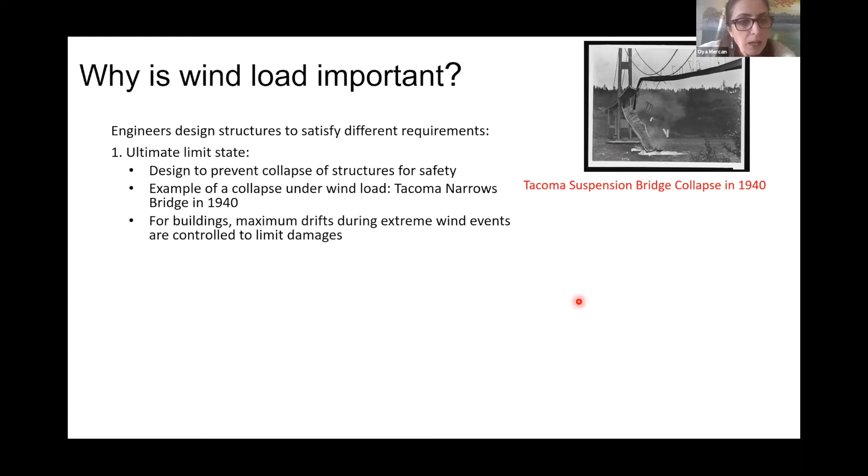In addition to safety considerations, we also make sure that the serviceability limit states are satisfied, which means that the drifts, accelerations, and vibrations of the structure are kept under some limits so that the occupants can use that structure as designed. We wouldn't want the structure to experience non-structural component damage.

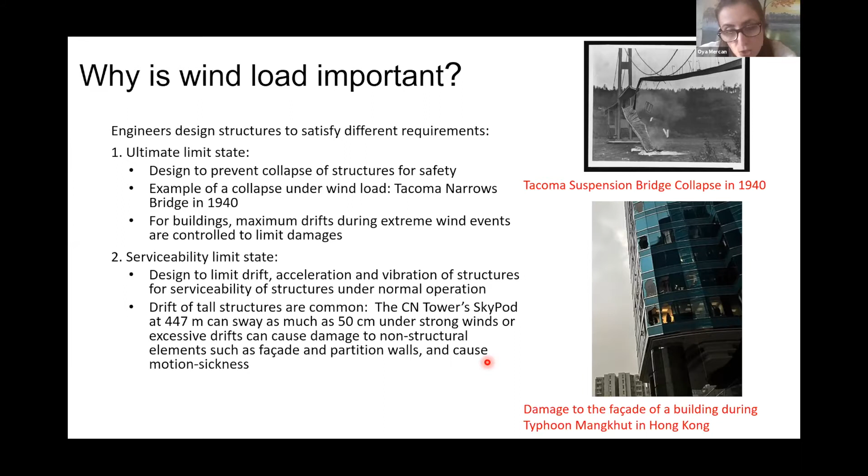For example, the picture on the right here shows damage to the facade of a building during a typhoon in Hong Kong. We also wouldn't want the structure to experience large accelerations and vibrations, making the occupants experience motion sickness or seasickness. So to make sure we design the structures properly, we use what is called the Davenport wind load chain, developed in the 1960s.

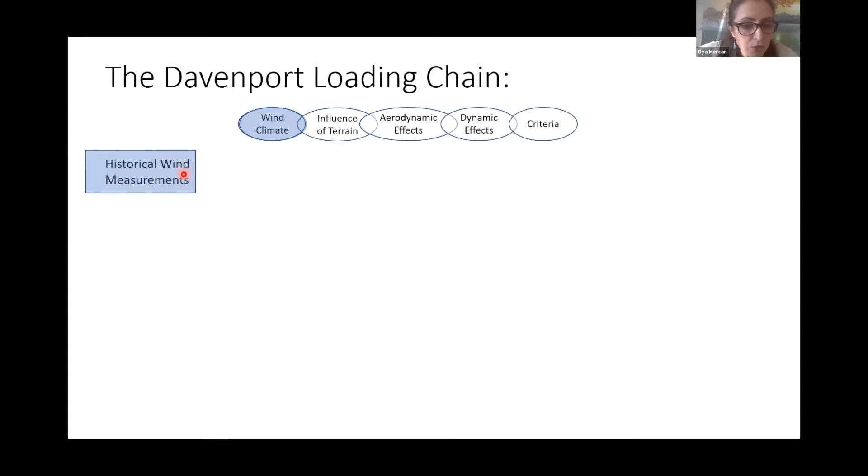In this load chain, on the left side, we start with the wind climate. Typically, in traditional application of the wind load chain, this information about the wind speed and wind climate comes from historical wind measurements, typically from airports.

Now we need to introduce the influence of the terrain. If we are designing a structure in open terrain with a smooth surface, the wind speeds near the surface are going to be much larger than designing a structure within a rough terrain, such as a city center. So depending on where the structure is going to be built, we need to adjust the wind speed profile accordingly.

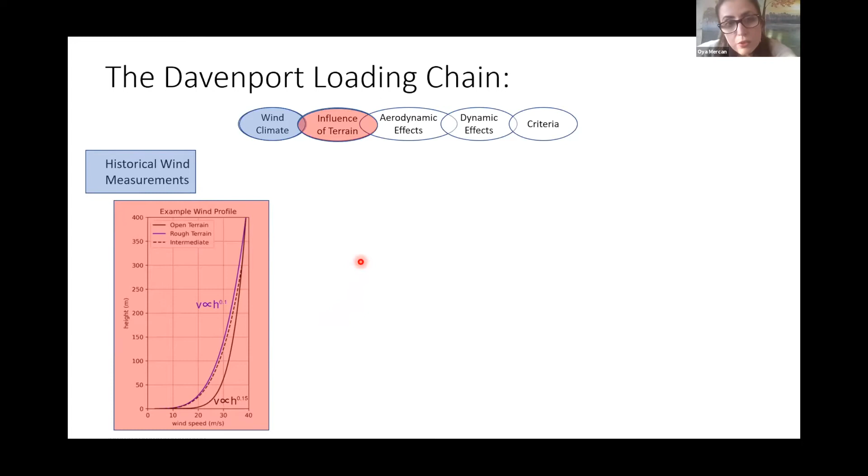We then need to consider the aerodynamic effects, which is simply the interaction between the wind flow and the structure that is causing the loads acting on the structure as the resultant of the wind pressures.

Depending on the complexity of the structure, if we are allowed to use codes and standards, we can quantify the wind loads using the codes. In Canada, we are using the National Building Code of Canada.

If we are only interested in the along wind direction, we can use some stochastic wind load methods to quantify the wind loads. If we are interested in understanding the three-dimensional wind load acting on the structure, and if we have capability to do experiments, we can use wind tunnel testing, or we can do a virtual wind tunnel using computational fluid dynamics. Within our group, this is the fourth one.

The CFD approach is what we are doing. Here we have a structure in a virtual wind tunnel, and we can visualize the wind flow around the building at different angles of attack.

Once we quantify the wind load, the next link in the chain is the dynamic effects. To be able to do that, we need to simulate our structure using structural dynamic tools.

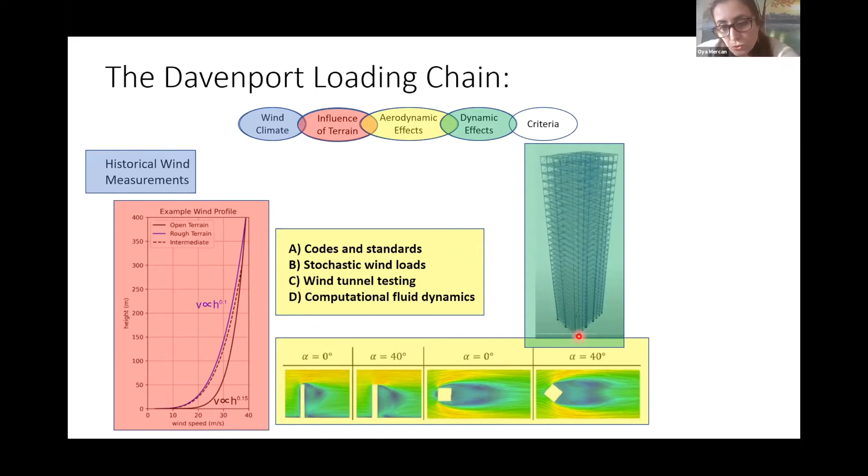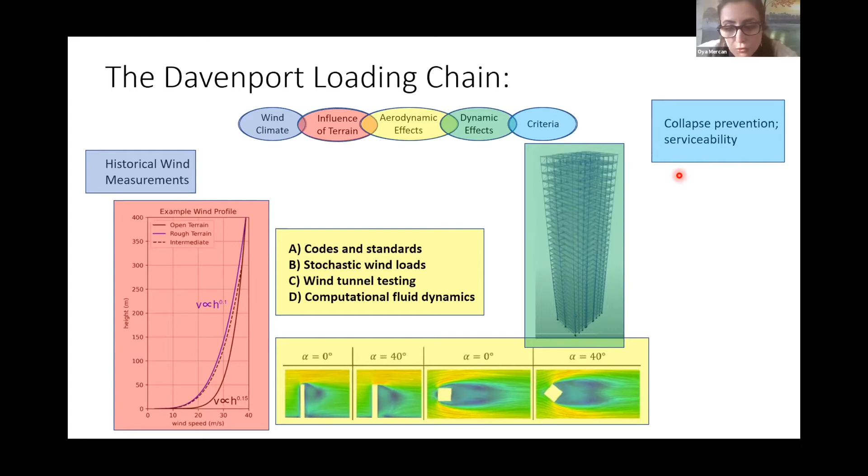Finally, once we finish all the steps in this link, we can have quantities of interest at hand, such as drifts, accelerations, velocities of each floor. Then we can introduce our collapse prevention and serviceability states to decide whether or not this structure performed acceptably.

So when we started doing our transdisciplinary research, what we have done is we took this chain and we left the second, third, fourth, and fifth link as it is. What we have done is that instead of using historic data for the first link, we obtained that information from global climate model projections.

Here we have the graph starting from the 1950s until the end of the century from 19 global climate models for yearly maximum wind speed data. There are different techniques available. In this particular case, we performed statistical downscaling, and Karen Smith and Paul Kushner might talk about this a bit more in detail in later presentations.

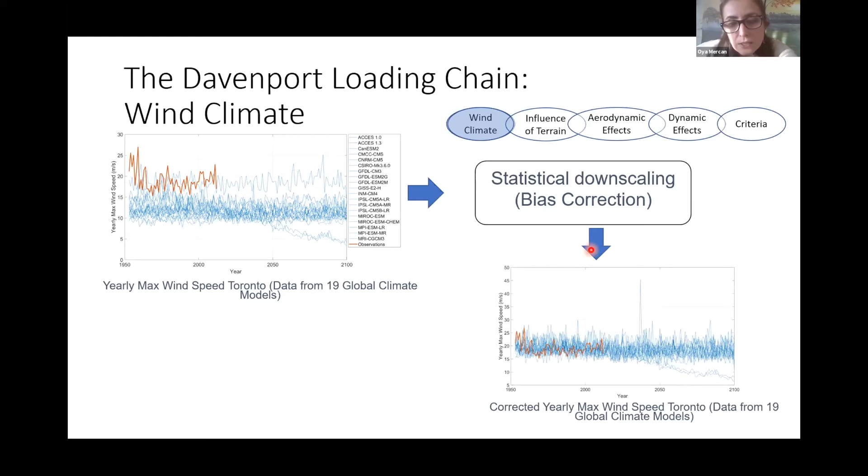Once we have the bias-corrected downscaled data, we can use extreme value theorem to estimate future design wind speeds, and we can propagate that information through this chain so that we can understand what happens to a selected structure under changing wind climate conditions due to climate change.

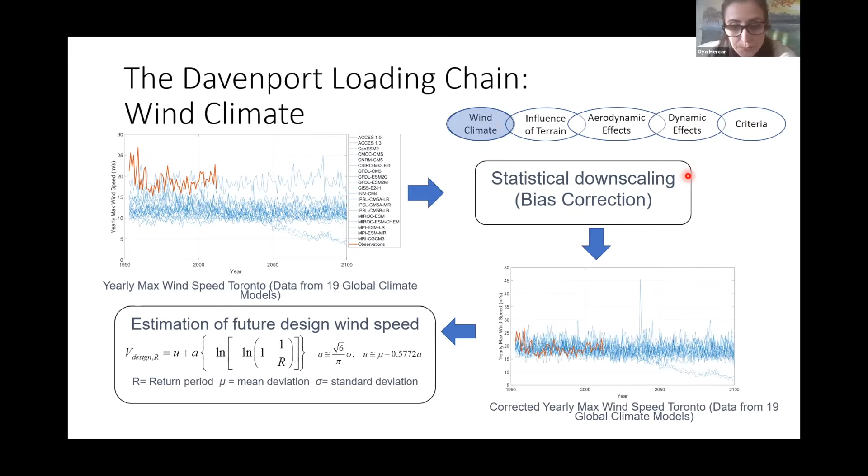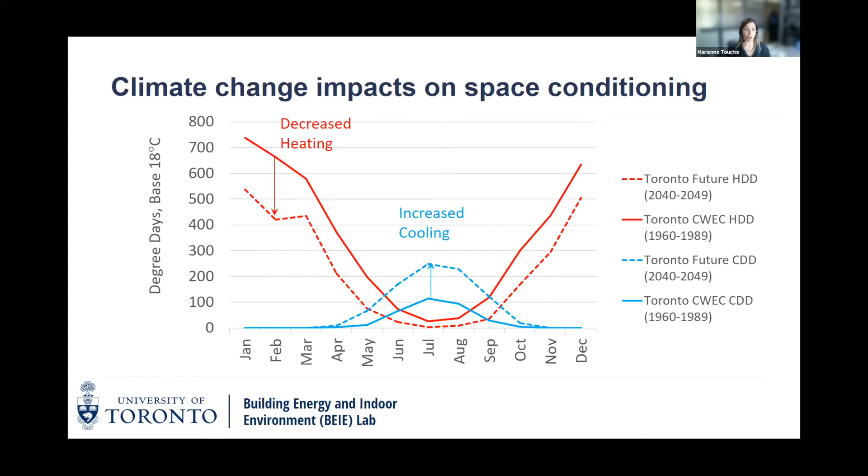So with increased temperatures, we will see a decrease in our heating loads, but also an increase in our cooling loads. And I'm focusing here on heating and cooling because the work that we do is really looking at how building performance is impacted by climate change and in turn impacts climate change, because space conditioning is responsible for the vast majority of building GHG emissions, and so something that we need to pay a lot of attention to in the coming decades.

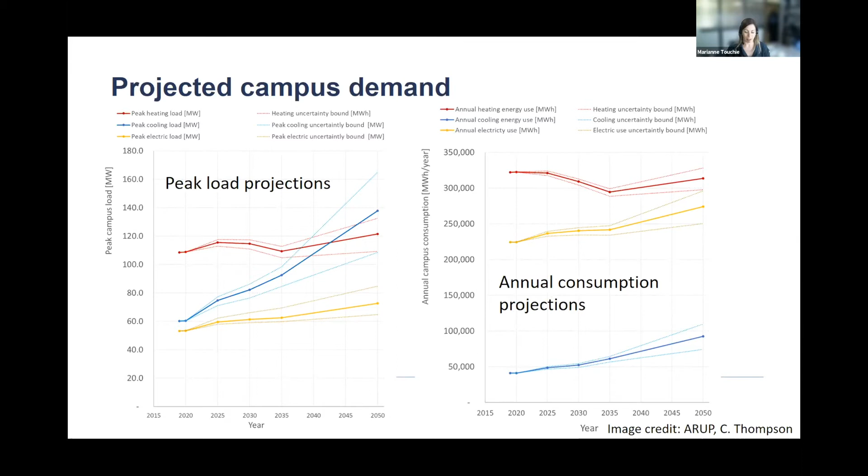And it's not just, I mean, of course, all of this is about ensuring that we're reducing the effects of climate change. We also need to consider on campus the cost of these changes. And so as we move to a low carbon economy, there will be either through carbon pricing or changes to our fuel sources, significant impacts on the university's operating cost. So for all of these reasons, U of T has really undertaken a fairly aggressive carbon reduction strategy, fairly aggressive approach to carbon reduction in the coming decades.

And ideally by 2050, the goal is to get to the point where our carbon emissions are reduced on the order of 80% from where they are currently. And then those are offset by renewables, either on or off campus. And so this path over the coming decades is influenced by a number of different components, contributing components. So how our new building design standards change, how we provide energy on campus.

So thinking about this from an adaptation perspective, ensuring that our existing building systems are designed to keep our occupants comfortable and healthy in a changing climate. We need to think about existing buildings through two lenses. I've mentioned the impact climate change will have on building design and operation, so we need to adapt buildings to deal with changing climates. But while doing so, we also need to ensure we're reducing energy consumption and subsequent GHG emissions for that mitigation piece. Making sure we're addressing both, and although there are synergistic retrofits, there are different things to focus on for mitigation versus adaptation.

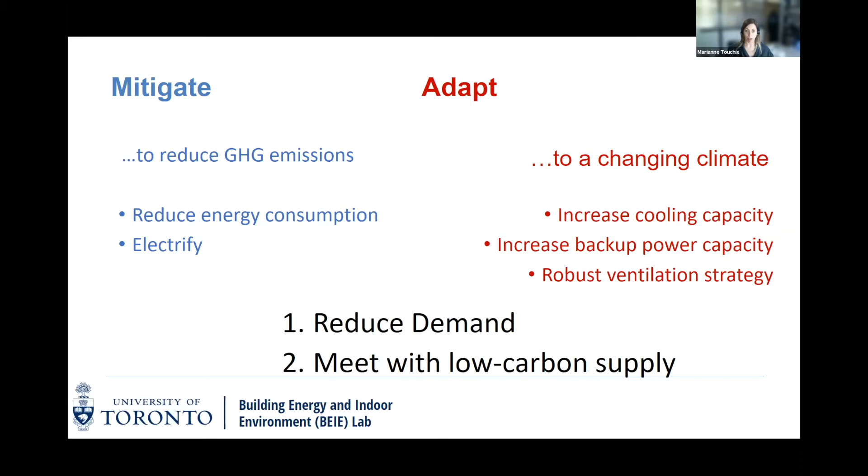This is really the lens with which Joey approached his study. The original scope was meant to take a selection of buildings from across campus representing different archetypes, from fairly modern buildings with centrally controlled systems through to historic buildings with relatively decentralized systems. The realities of gathering the information required prevented us from doing the full suite of buildings, but this became the focus of Joey's work: a couple of decades old, relatively small, simple building on campus, the Fields Institute.

The way we analyze a building is by constructing a virtual model of it and looking at all the heat, moisture, and air transfer within that building, and the energy inputs - the natural gas and electricity required to heat, cool, and ventilate that building and provide lighting and plug loads to all occupants. Then we control this model to essentially mimic the conditions one would see in this occupied building.

We're tuning the indoor temperatures and the amount of outdoor air delivered to these various spaces. Once this model is built, we calibrate it to ensure the modeled energy outputs match the existing utility bills for this building.

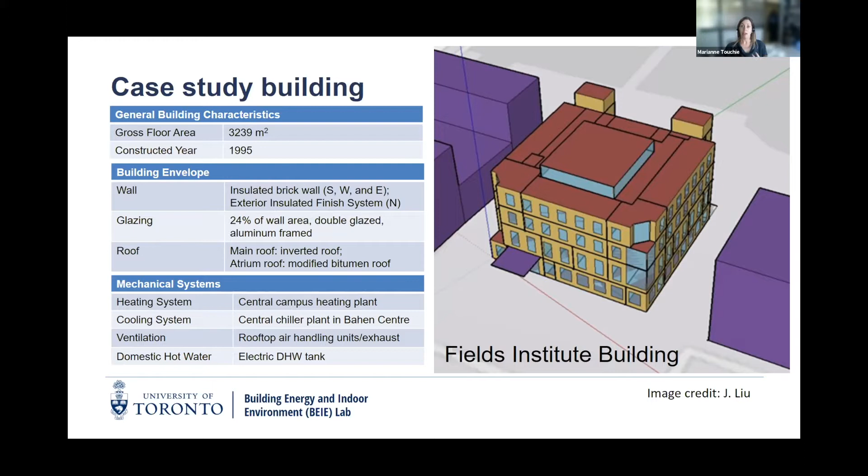Once we have a calibrated model, we can start to play around with things in this virtual space. The objective is to model how this building would respond to a changing climate. One of the inputs to an energy model is what we call a weather file, essentially a snapshot of a year, usually a typical meteorological year, and you run that model to get the output energy consumption.

But with this building, instead of running it with our current weather file, we replaced that with a future weather file estimating what conditions might look like in the 2040s and what the subsequent energy outputs would be.

Then Joey developed a series of both passive and active retrofit strategies to see if we can actually reduce that energy consumption. He tried a number of different things, including optimizing solar gains through things like overhangs and fins - you can see these purple things on the left on the retrofitted building - and window films to again try to control solar shading.

Retrofitting wall systems through increased thermal insulation, replacing the windows with high performance units, and doing air sealing to seal up any uncontrolled air leakage across essentially holes in the building envelope, which impacts energy consumption. The one active measure installed was recovering waste heat from exhausted air and delivering it to incoming air, trying to recover some of that waste energy in order to reduce energy consumption.

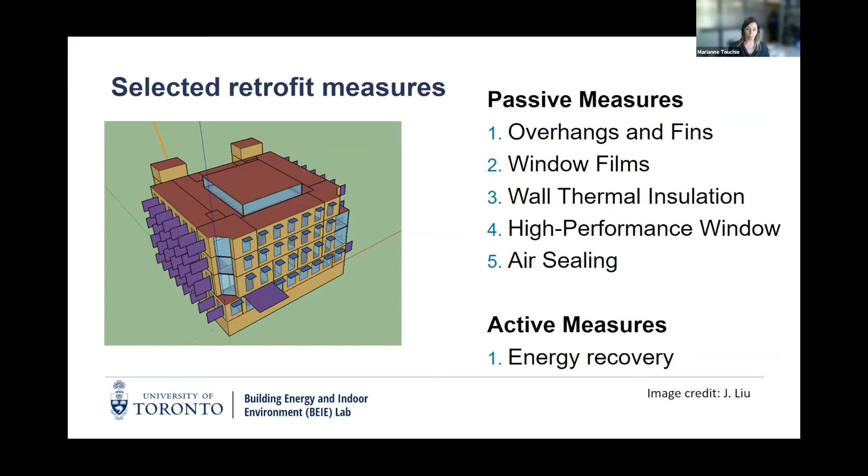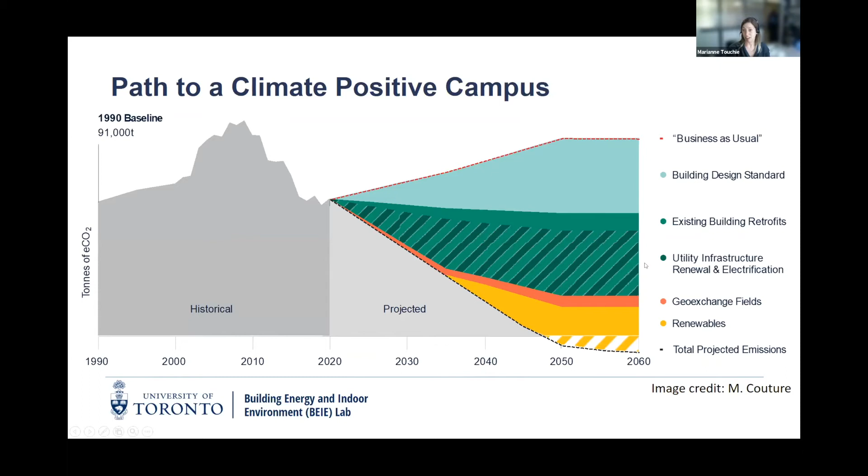I realize I'm a little over time, so I'll skip ahead quickly just to give a plug for our current research work. We have another master's student exploring in situ retrofit strategies for the curtain or window wall systems you see all around downtown, which are notoriously poor performing and present a huge risk to residents, but also climate risk if we don't significantly improve their performance moving forward. We've got a student working on that right now, which is really exciting.

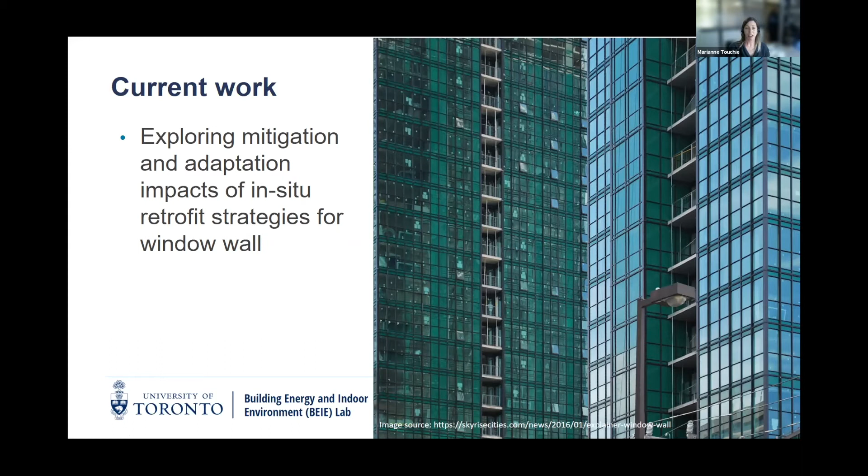The other project, not related to this work, but worth mentioning briefly, is moving beyond climate positive and actually incorporating people into the mix. With some of my social science colleagues, we're working on net positivity, both for people and the environment on campus. That's another exciting project coming down the pipeline.

Sorry, Jamie, I went a couple minutes over, but happy to answer questions now if there's time, or we can switch to the next presenter.

There are some questions here. Should we do that now? I think we should just, if you want, Marianne, look in the Q&A tab, maybe type the answer there. Sorry, where is the Q&A tab? Oh, there. Yeah, down there. There's some questions down there. I'll answer these while the next speaker goes. Just to keep on track, we only booked a little bit of time to give time for presentations. So I think next is Daniel.

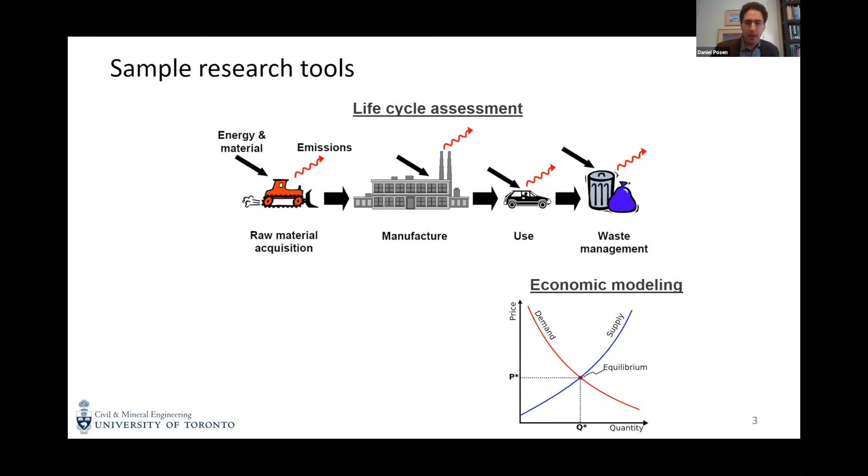And the kind of tools that we use broadly are things like lifecycle assessment, where we try to think through the environmental impacts of a product or process from cradle to grave or cradle to cradle, however you want to put it. Tying that in with economic modeling of how new products are going to shift demand in the market and what implications that might have for environmental impacts. And then broadly tying it together with decision support and uncertainty modeling and thinking about how do we make decisions and how do we support sustainable decisions under conditions of fairly deep uncertainty in these spaces.

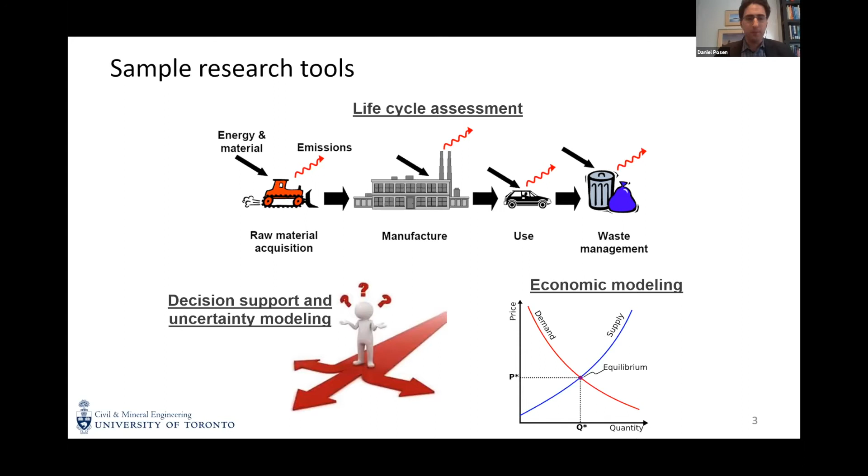And so as a result, because I come at this more from the tools and the principles of trying to tie together systems, we apply these ideas of life cycle thinking, again, thinking through systems, to a wide range of different systems and technologies. So I've been doing a lot of work with vehicle technologies and thinking about fleet scale, life cycle assessment and policy modeling.

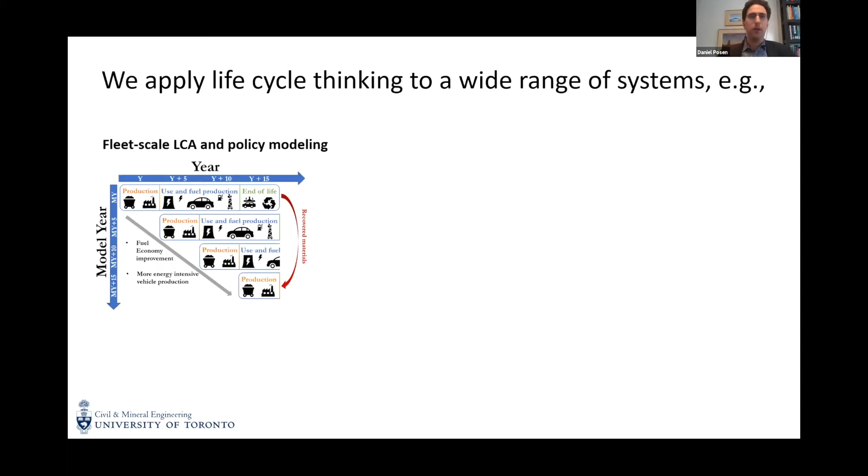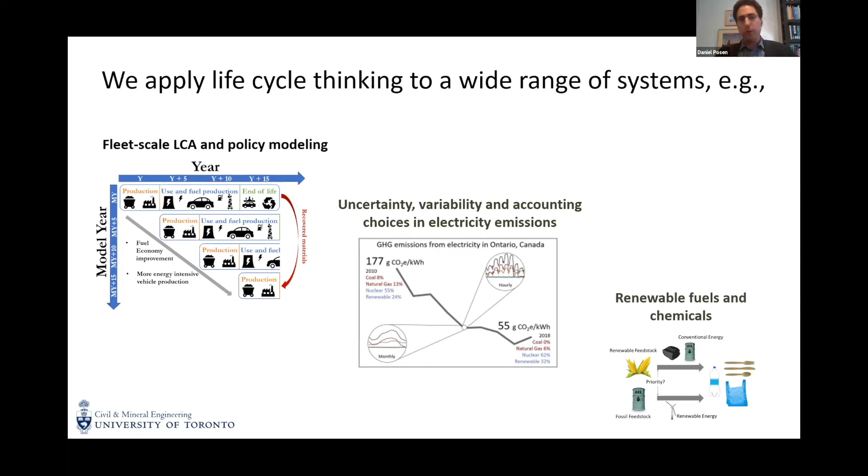How do we decarbonize our transportation fleet? I've been doing a fair bit with the electricity system, and there's an interaction there, of course, with electric vehicles that I'll be talking about a bit today, and uncertainty and variability and how we model those emissions. And more broadly, thinking about renewable fuels and chemicals and what our energy systems look like going forward.

Okay, so that's just sort of the deeper background on where I'm coming from and why you're going to see a number of different angles in today's talk.

Broadly, the role I see for myself within the Center for Climate Science and Engineering, it's bringing together this life cycle look at the mitigation, the greenhouse gas reduction and mitigation piece, but it's also looking for these new interactions between climate models and engineering systems.

So what I have here is this mental model, at least that I had going into this, of what these interactions look like, that we have mitigation, actions that are going to reduce emissions that cause climate change, and that lets us explore what our emission pathways look like. And then we tend to take those emission pathways and we're going to feed them through a climate model, right? To understand what impact these different emission profiles, these global emission profiles will have on the future climate.

And then that tends to feed back to, well, here's what the climate's doing. How do we adapt? How do we get ready for this changing climate? And a big piece of what I want to do within this center is to add this additional arrow, to think, well, not only do we need to think about how that changing climate is going to impact our ability to manage it and our ability to adapt, and what do we need to do to respond to the changing climate, but at this point, some degree of climate change is already locked in, right? It's sort of too late to say we're going to avoid climate change altogether. So how does the existing warming that's already happening affect our efforts to reduce emissions?

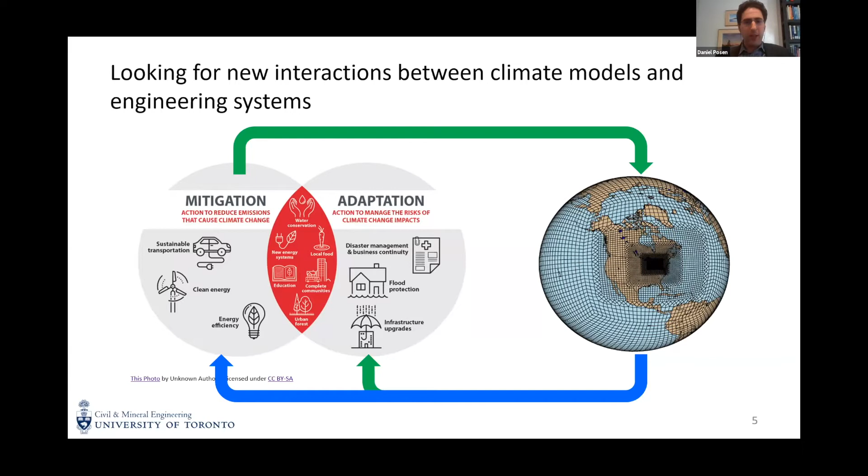And so this is sort of what I mean by flipping the question. Instead of asking, what do our emissions do to the climate? What does climate do to our emissions? And so I'll talk about a number of things that we've been looking at within that. So today's presentation, I've got a number of projects that fly the CSE banner. I'm going to try and talk through a few of them.

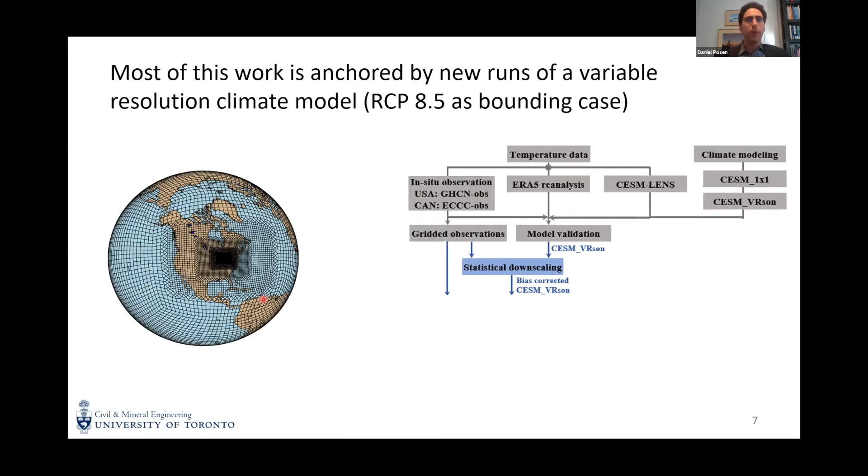What I'm showing you here is on the left, we have this variable resolution run where we're really zooming in to high resolution over Southern Ontario here - I switched that to a laser pointer. High resolution over Southern Ontario, but effectively we're getting pretty good resolution over the entire North American domain, which you're going to see about.

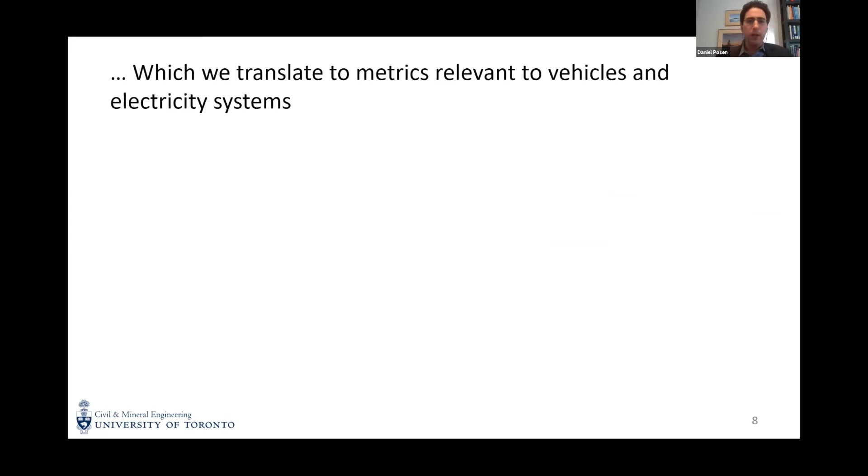So we take all this work that goes into building out the climate model, and then we're looking at translating these climate models into metrics that are relevant, in my case right now, to vehicles and electricity systems. Some of these metrics we care about are things like fuel cold weather properties.

In particular, biodiesel, a renewable alternative to conventional diesel fuels. One of its challenges is it doesn't have very good cold weather properties - at relatively moderate temperatures, it starts to precipitate out, basically turns into a wax and stops being able to flow properly. Basically, you can't run full biodiesel in the middle of winter, not without some kind of chemical correction so that it'll work in our existing trucks.

So this really matters. To be able to look at how much of these fuels we can use, what you really need to understand is what is the coldest weather we're going to face. As the climate warms, we can potentially start using more of these renewable fuels because they don't face as severe winter limitations.

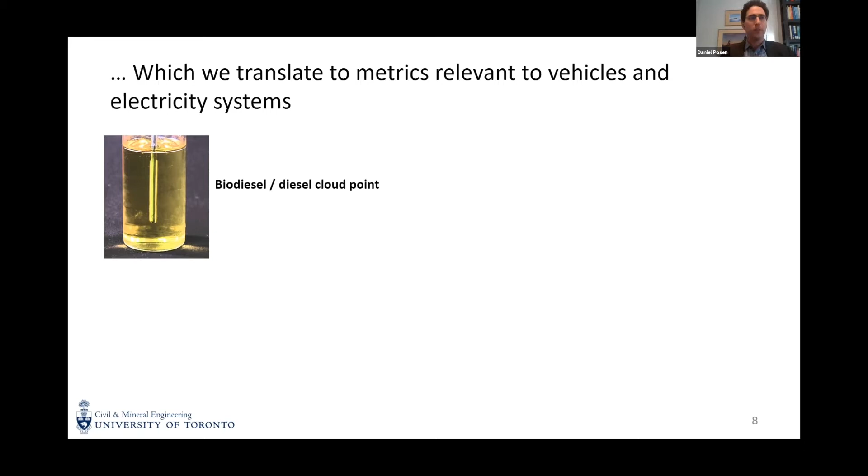We're going to be looking at vehicle energy use. We did some work looking at all the different climate parameters that might impact vehicle energy use, and zoomed in in particular on ambient temperature, which has a fairly substantial impact. I don't think anyone is surprised to hear from that last talk that yes, temperature is going to affect building energy use because we use a lot for heating and cooling. Turns out temperature can also have a fairly substantial impact on the energy used by our vehicles, and in particular electric vehicles, which is where we're heading, are particularly sensitive to temperature.

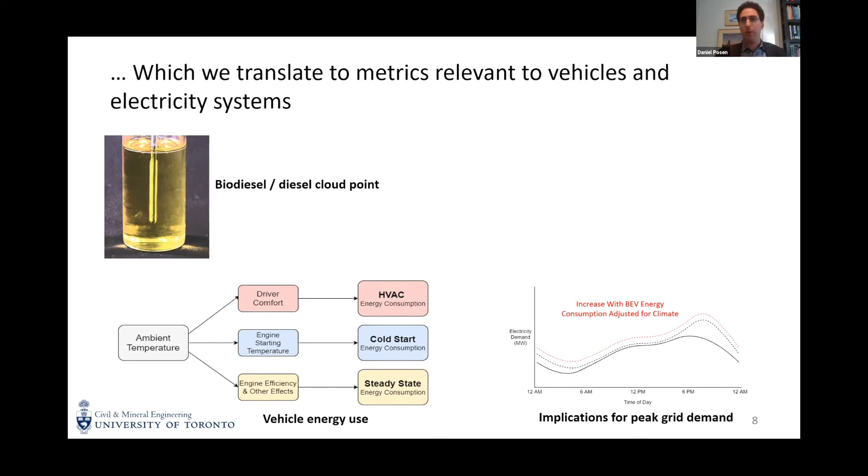And then we can translate that not just to the total energy use, but what are the implications of electric vehicles on peak demand? One of the things we really care about in electricity systems is it's not just about the total energy we use, it's also about that match between supply and demand. So there's a question around when electric vehicles are going to charge, how much more might they need to charge during extreme weather days, and what's that going to do to the peak demand - the hour with the highest demand on our electric grid and our ability to meet that demand.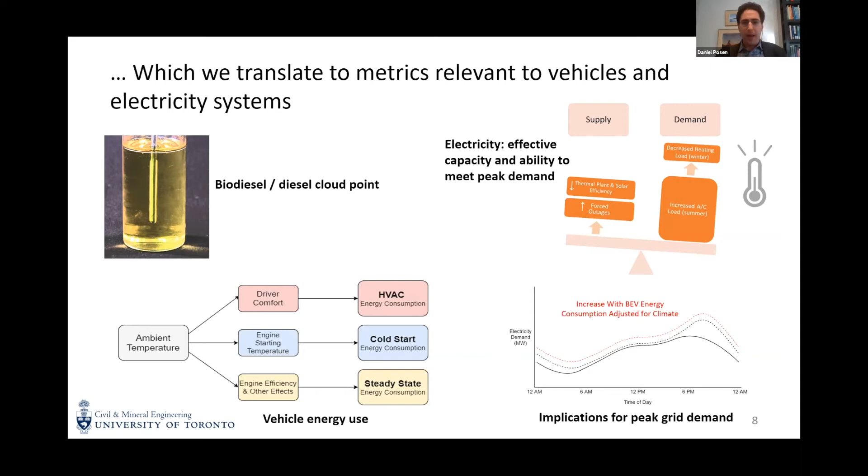Separately, and we haven't merged these two topics yet, but that's an area of ongoing work, we looked at, even in a world without electric vehicles, what's going to be happening in that electric grid, and what's going to be happening both to supply and demand of electricity as the temperature changes going into the future. These are some of the domains we've been investigating.

So here's that chart from before. Metrics relevant to mitigation and to engineering systems, in particular, vehicle and electricity. So what do we need to know?

We're going to need to know things like, what is the 2.5 percentile minimum temperature? Because that's how fuel regulators tend to deal with operability of these fuels that don't work well in the cold. They look over the last 30 years at any given 2-week period to find the 2.5 percentile coldest temperature. They don't take the absolute coldest - at a certain point you can't bound to maximum minimum temperatures, but they take a threshold at the 2.5 percentile. That's the cold temperature for which we need to design our fuel systems.

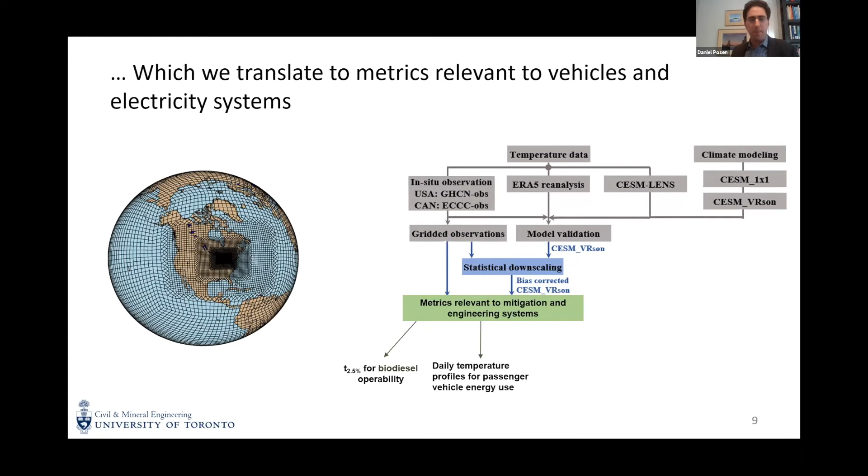How is that changing over time? We get daily temperature profiles for passenger vehicle energy use, and then we take daily and seasonal, both temperature and precipitation profiles for power generation and demand. Precipitation matters here because we have a lot of hydropower in Ontario. We'll talk a little bit more about why temperature matters. So that's the big picture of what we're doing.

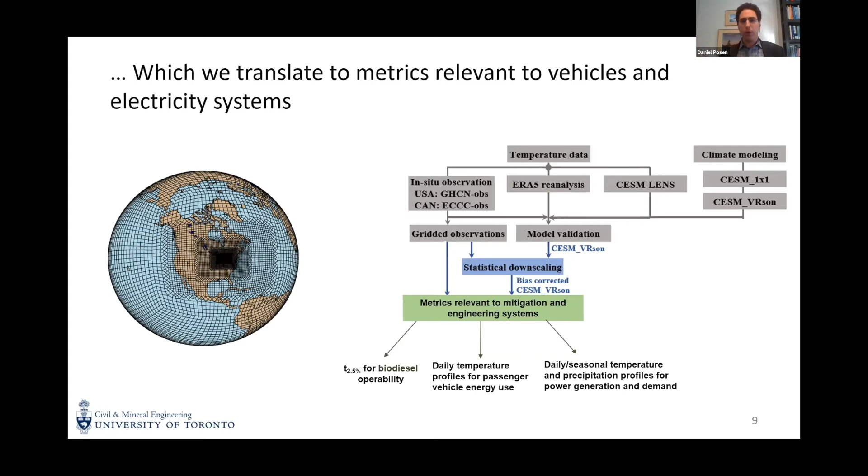I'm not going to get into details on the methods, but what I'll do is run you through a number of the results we've been coming up with.

One, climate change increases biodiesel operability windows by up to several weeks. What I'm showing here are maps of 3 different fuels with 3 different cloud point types. There's a lot of detail I'm glossing over, maybe oversimplifying, but fundamentally the top panels represent summer fuels, the bottom panels represent winter fuels, and the middle panel is an in-between. On the left, we show for each state or province within our grid what is the maximum number of weeks of the year that region could use each of these fuels.

For our winter fuels, we'll notice in the southern states they're all in yellow - pretty much winter fuels they could use all year, no problem with these fuels. Whereas our summer fuels, we do have some fairly substantial limitations - you only can use these for about half the year at best in many of these jurisdictions. This is under the historical climate model.

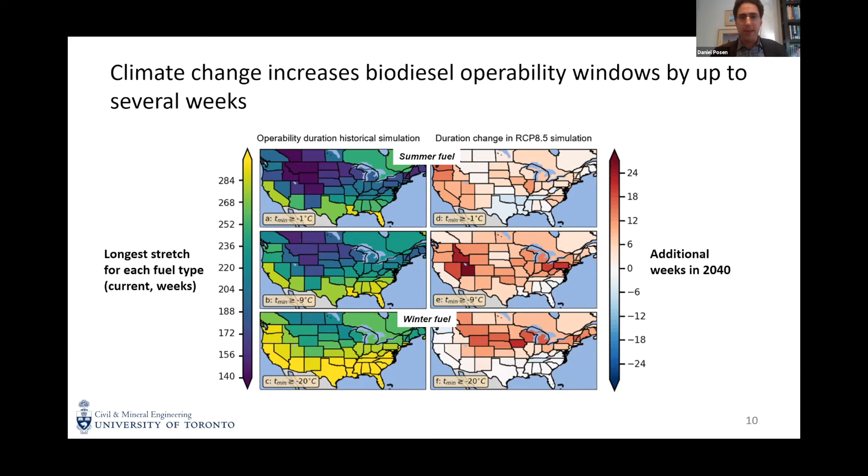And on the right, what we looked at was under climate change by 2040, under this relatively severe climate change scenario, how many more weeks of biodiesel use do we get if we're looking for the longest stretch that we can use each of these fuels? Again, there's a lot of subtlety here, but the answer is yes, there are some meaningful changes in terms of how long we get using these renewable fuels or any other fuels with poor winter properties. As the climate warms, we get to use quite a bit more of this, and that can have some meaningful implications for how we decarbonize our transportation system.

We looked as well at, even without the changing climate, is there a way that we can redistribute what we call these supply orbits? These orbits basically group together geographic clusters that are used for distributing the fuel, and that tends to be the limitation - you have to look at the coldest point within that cluster, within that supply zone, and that's what limits which fuels you can use.

So we did some work looking at, well, could we recluster these zones? Instead of using the current existing supply orbits, what work can we do clustering along similar temperatures to reduce what we call the cloud point giveaway - to reduce the amount at which we're over-designing our fuel. And we did find some different zones from the current zones.

We did some work looking at what if you were to start drawing boundaries around individual cities, for example? Instead of saying, because Toronto is in zone number 1 or whatever zone it is, it has to meet the coldest temperature throughout that zone, what if we drew a boundary just around Toronto? The answer is, again, you get fairly different results, and you get the ability to incorporate quite a bit more renewable fuel when you start to tailor and narrow those zones and aren't limited by the broader supply constraints of larger temperature zones.

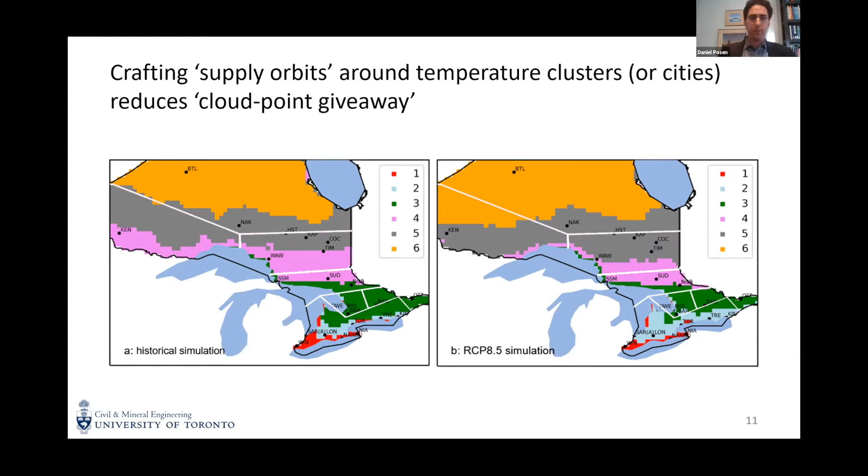All right, then we move on to electric vehicles.

It's fairly well known that electric vehicles have a strong temperature sensitivity. There have been a number of studies that have tracked electric vehicles over the course of the year, and they tend to find that in the middle of winter, electric vehicles are using 50 to 60% more energy than they would in mild weather.

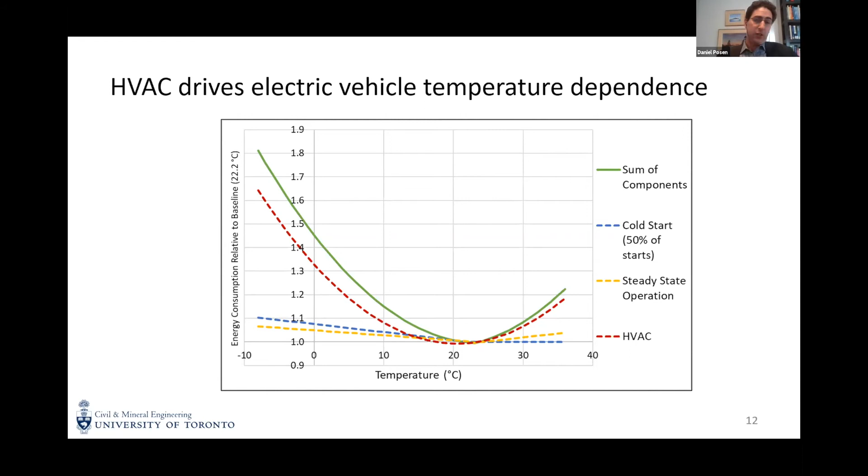So we did some work looking through the literature trying to understand the breakdown of why this is happening. There's definitely a reduction in battery capacity in cold weather, but fundamentally a lot of it is just down to exactly what it is with buildings: heating and cooling of the vehicle cabin. There are some other effects, but the main message is it's actually driven by temperature control within the vehicle cabin.

What you tend to get, maybe not surprisingly, is offsetting effects. In the winter, winters get warmer and more mild, so we use less energy. The summers get hotter, a little more severe, so we use more energy in the summer. That does tend to offset, so we end up with relatively small changes overall for the course of the year — about plus or minus 1% depending on where you are for combustion vehicles, but plus or minus 2 to 3% for electric vehicles.

Although these numbers look relatively small, we have to remember that a 1% increase, say in gasoline use, that's 500 million liters of gasoline across the US. We're still talking very substantial volumes of fuel, because we're talking throughout the entire transportation fuel use, which is a huge contributor to our greenhouse gas emissions.

But when we start to think about the fact that these come about from offsetting summer and winter changes, we have to wonder: when might it matter that on a given very cold day or very hot day, we're using a lot more energy? And the answer is, that's where we get to this question around electric vehicles and their impact on the grid.

A lot of studies that investigate how electric vehicles might change the load profile for electricity systems, or the energy they might use, tend to ignore the temperature effect. They tend to use an average fuel economy, an average fuel consumption for these vehicles throughout the year. So we took a look at how this changes if we push harder on saying that whenever you do an analysis of electric vehicles, you really have to think about that seasonality.

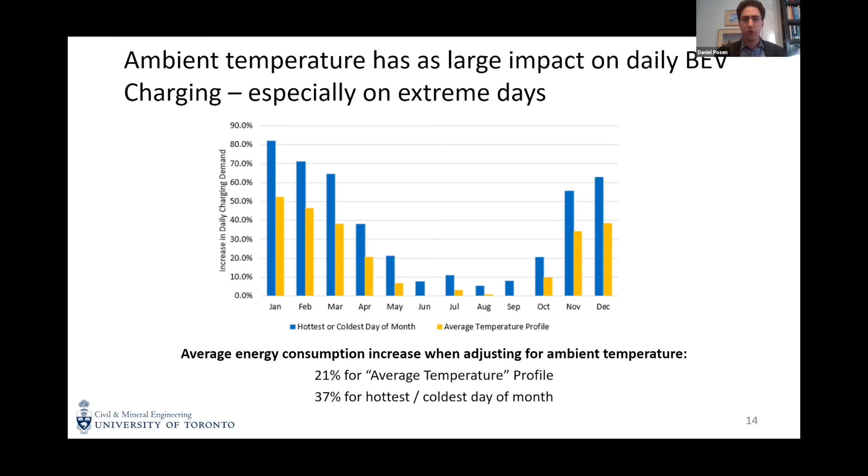We then think about how that impacts charging and our ability to meet that demand peak, depending on when people are charging. So we built a number of different scenarios around when people are going to charge: do they charge as soon as they get home, do they charge when they get to work, or do they preferentially charge when off-peak pricing starts in Ontario, when electricity gets cheaper?

What we're showing here in particular is how much more electric vehicles are going to increase peak demand, shown here in the light gray or light coloring. If you were to ignore temperature, just having electric vehicles on the grid is going to increase peak demand.

But how much more do we get if we think about these extreme days? Fundamentally, if you're modeling electric vehicles and their implications for the grid, just having the vehicle is the bigger chunk, but this temperature effect is really non-trivial.

One of the most realistic scenarios here is residential charging, so people charge as soon as they get home. Electric vehicles are going to add potentially on the coldest day in January 1,500 megawatts of demand to the system. For reference, the typical peak demand right now is about 9,000 megawatts. So we're talking a whole new large power plant needed to meet that demand, to meet this 1.5 gigawatts. That's basically a large nuclear plant needed to meet that peak.

About a third of that is coming just from the fact that it is the coldest day, just that temperature effect. So if you ignore that temperature effect, you're missing quite a large chunk of what we're doing to the grid.

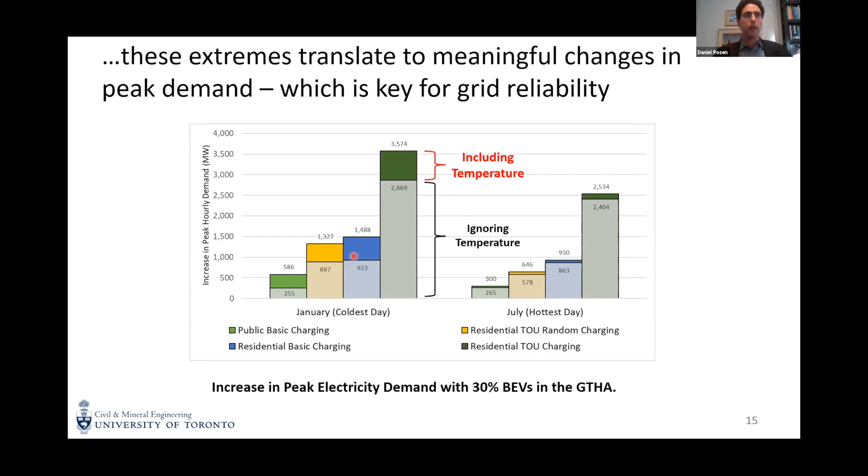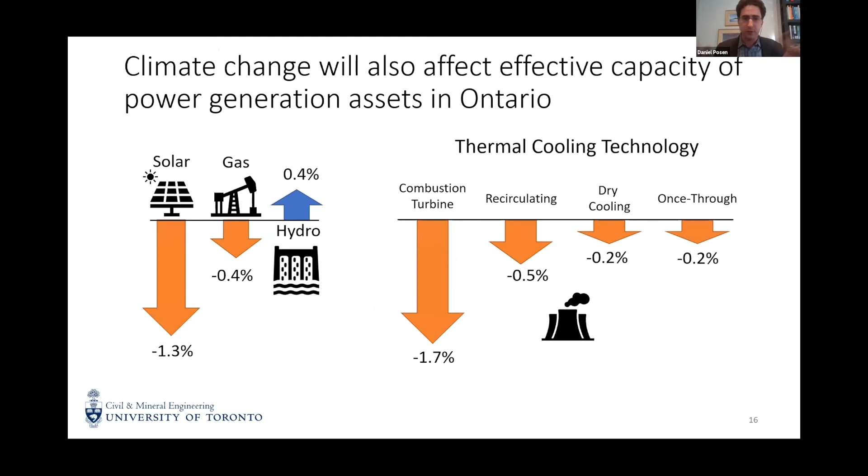I'm going to skip over a little bit of this and just say, look, we also did a study of the grid itself. For electric vehicles, we'd like to merge these two studies soon, but we haven't done that yet. We said power generators are going to become less efficient, and demand is going to go up. Both of these things are going to happen as extreme weather increases, especially in the summer.

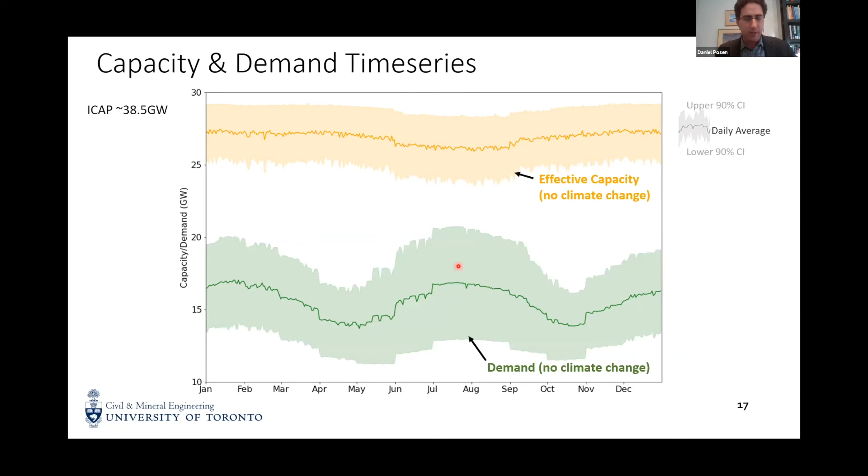So what are we seeing here? Here's our time series of our effective capacity, our ability, the maximum electricity we can supply at any one time. And here's the historical demand curve with no climate change. It's a little bit higher in the summer because it's hotter, but some of the reasons, for example, that you heard from Professor Touchie.

We look at the effective capacity in the summer. You don't see major changes, but there are some non-trivial, a couple percent changes here where we do get a little bit less capacity because our power plants don't run as efficiently when it's really hot.

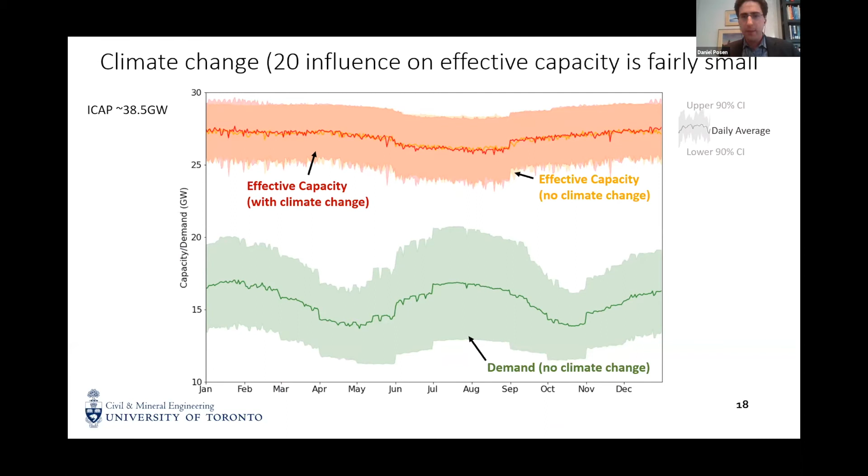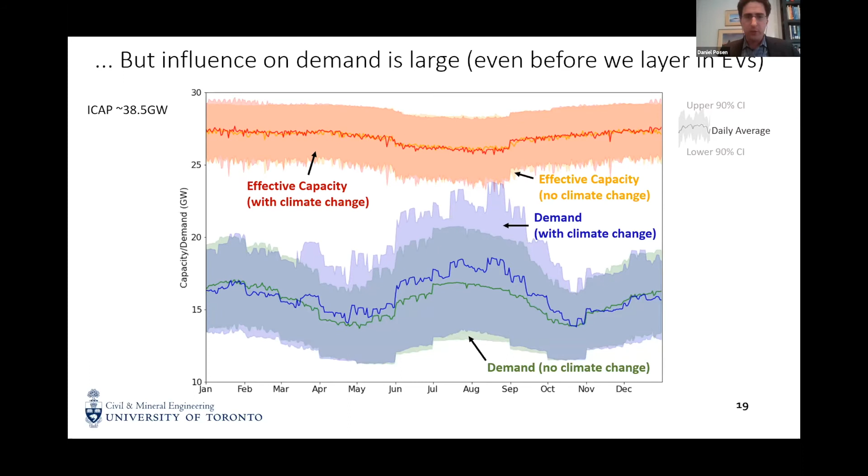But more importantly, you see a big increase in the overall system demand. Again, this is without the electric vehicles. This is just, hey, summers are going to get hotter, we have more cooling demand. And what you may notice is right in these extremes, on some of these extreme days, we're starting to get some overlap where our demand may outstrip our supply.

Now, there are lots of simplifications that went into this model. At the end of the day, we are not actually forecasting what the grid will look like in 2040. But what we are saying is, if you don't account for climate change by 2040, which many system operators are not doing, you're going to miss some big demand spikes coming that correspond in particular to times when our supply is the lowest.

It's not enough just to think about demographic change and historical weather profiles. You better be thinking about what these new extremes might do and what risk there is to possibly not being able to meet our electricity supply at any given hour.

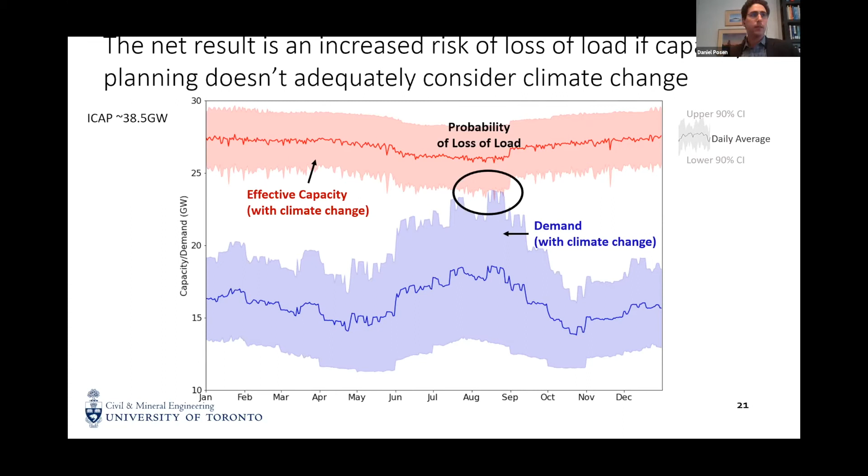So bottom line: climate variability and climate change influence our energy and transportation systems in ways that are often overlooked. It's going to open up new opportunities for fuels with poor cold weather properties. We're talking a couple percent change in our energy use from vehicles, which can be fairly substantial in terms of the impact they could have on the grid. At 30% electric vehicle penetration, electric vehicles could increase our winter peak electricity demand by 15 to 20%, and a third of this is driven by the cold weather.

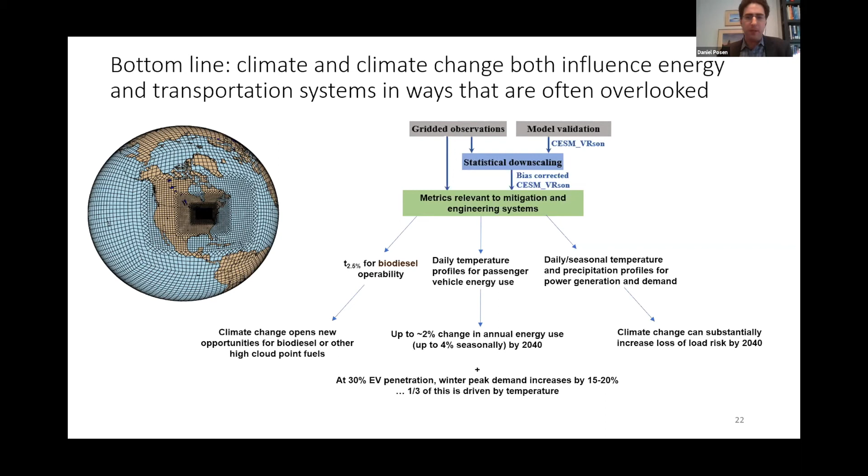And if you don't account for climate change, you're going to have a higher risk of loss of load, meaning inability to meet your electricity demand by 2040. So there's lots more to do. This is a very quick whirlwind teaser of some of the things we've been looking at. Really interested to find what other connections there may be for how the existing changing climate is going to change our emissions, and lots of other pieces too.

As we have to adapt to climate change, what's the embodied emissions in any new infrastructure we have to build, or what kind of changes are our mitigation efforts? As we start to move towards electric vehicles, does that increase or decrease the vulnerability of our energy system? So lots and lots of interactions to find. That's what I like doing, thinking about the system scale.

I have no idea if I'm over time. I probably was. I'm happy to take questions by email though, or I'll answer them in the chat. Yeah, thanks, Daniel. There's one question that I'm pretty sure pertains to you in the Q&A chat there. But Marianne, yeah, you want me to do that one in writing? Yeah, do that one in writing, and then we'll just so that we can try to get at least the presentation part done as on time as possible. Sounds good.

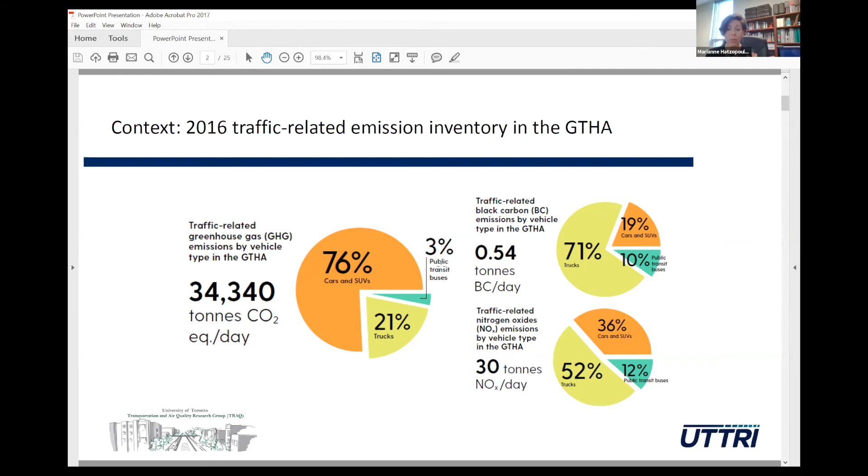for truck movements, commercial vehicle movements. And this is really going to anchor a lot of the trade-offs in terms of, well, what kind of policies are going to help us really achieve deep reductions in greenhouse gas emissions, but also gains in air pollution and public health spread across the population.

Now, what I'm going to talk about today is a study. I'm hoping to cover a few studies, but if I don't, and if we want to make gains with respect to time, I'll stop with this one study where we recently looked at personal greenhouse gas emissions from transportation. So to do this, we used data from the Transportation Tomorrow survey.

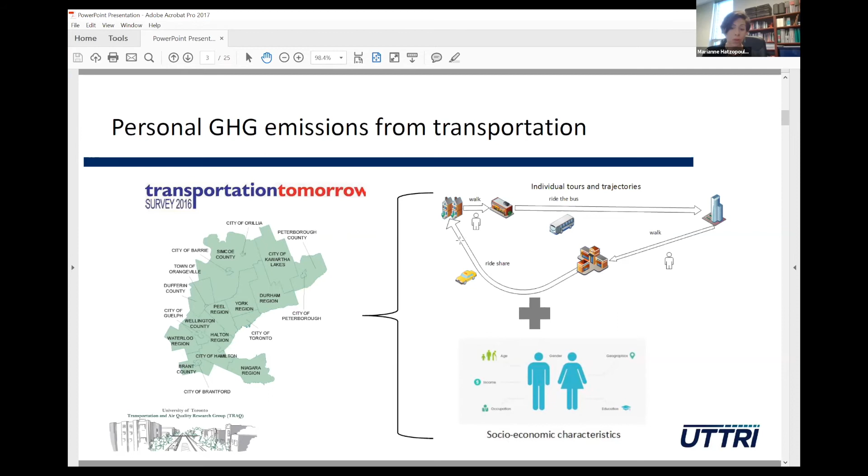The Transportation Tomorrow survey is this travel survey that is done every 5 years for the region, the whole Greater Toronto and Hamilton area, where we look at a representative sample of the population. We collect data about what people do in a day, all the things they do: I walk to the bus stop, I ride the bus, I go to work, I stop, pick up my kids from daycare, I go to the gym. So we have complete travel diaries for individuals as well as socioeconomic characteristics.

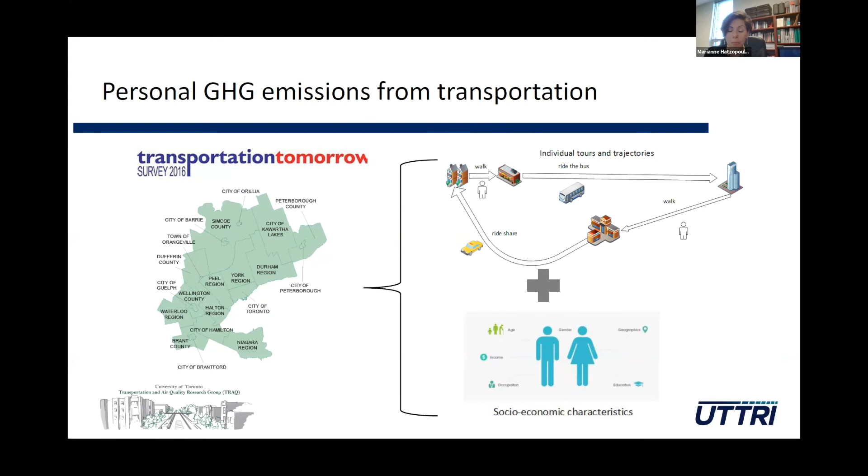And you know what, I just realized that I don't have this full screen mode. This is better. And their socioeconomic characteristics. So with this, what we basically did is we took every single trip in the survey. So we have about 160,000 individuals, close to 500,000 trips. And we tracked all the movements that people are doing. I'm not going to focus on methods at all in this entire presentation. Just believe me that we quantified the emissions from all the different modes, and this results from various previous pieces of research where we have generated very robust emission inventories for different modes.

If you look at just the distribution of how people move in the region, not their emissions, you're going to see about 63%, the biggest chunk of people actually drive. And we have 13% people who are passengers in cars, so they're not driving, but they are with somebody who's driving. We've got transit in gray, which is about 11%. This is subways, streetcars, buses, GO buses. We usually put GO rail in a different category because trains are diesel fueled and they have very different emission factors. And we have about, the yellow is walking.

So about 6.6% of the trips are actually done by walking. That's not people, that's just trips. If you go to people, you might get a slightly higher share. And then cycling also, but they're really small shares.

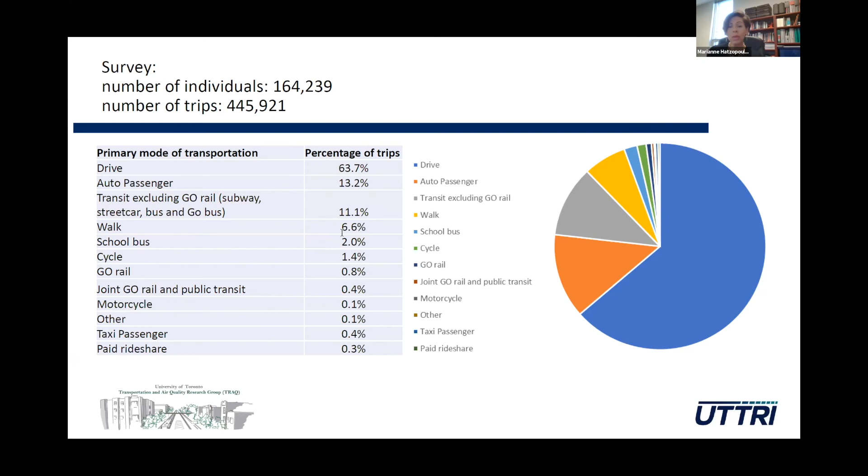So what we did is we said, let's estimate the total greenhouse gas emissions from all these people. And we've estimated it's about 25,000 tons per day from all these people. Slightly different than the 35,000, right? Because this is not including commercial vehicle movements or business travels or UPS trucks distributing things.

And then we said, let's take all these daily greenhouse gas emissions and bring them back to where you live in the GTHA, and let's look at what the map looks like. And needless to say, it kind of confirms our intuitive hypothesis. If you live in the suburbs, if you live far from the city center, you are going to generate in a day, to fulfill your transportation needs, a much higher amount of greenhouse gas emissions than if you live in the city core or very close to where you work.

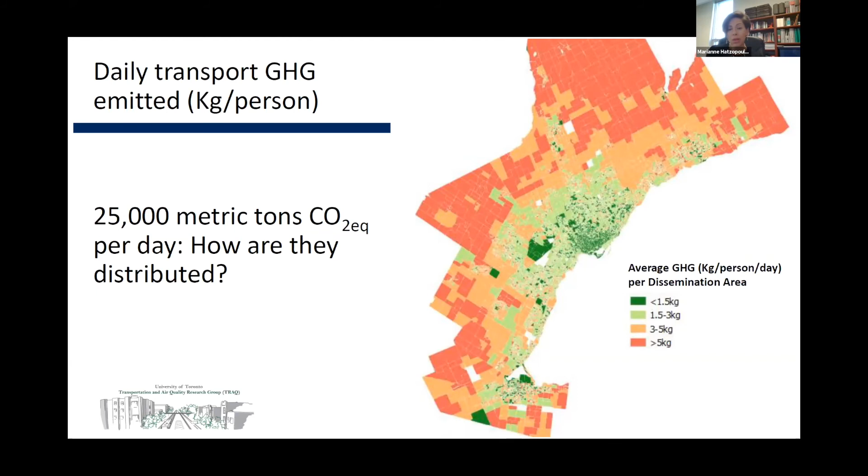So confirming very intuitive hypotheses, but it's just nice to have the numbers to show that. So then we said, let's actually look at those individual level GHG emissions and see how they're distributed across the population. And so this is kind of a Lorenz curve. So what this is showing you is what percentage of the population is contributing to what percentage of total greenhouse gas emissions. And the orange line is the one-to-one line.

Very interesting here. You can clearly see if I focus on the 0.7 number on the x-axis, which corresponds to 0.3 on the y-axis, this pretty much tells you that the highest 30% of the population is emitting 70% of the emissions. So we have 30% of the population responsible for 70% of the emissions, and the entire remaining 70% of the population are only generating 30% of the emissions. So there's definitely a lot of inequality in terms of who's generating transportation-related greenhouse gas emissions and who is not.

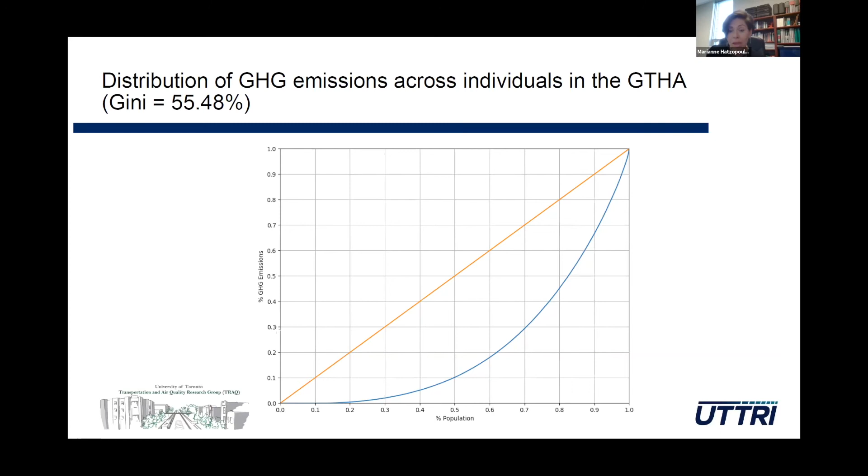So we started then diving into these questions of inequity and disparity. We dug into census data and we started looking at emissions, personal emissions, as a function of different variables. The first one you always think about is income.

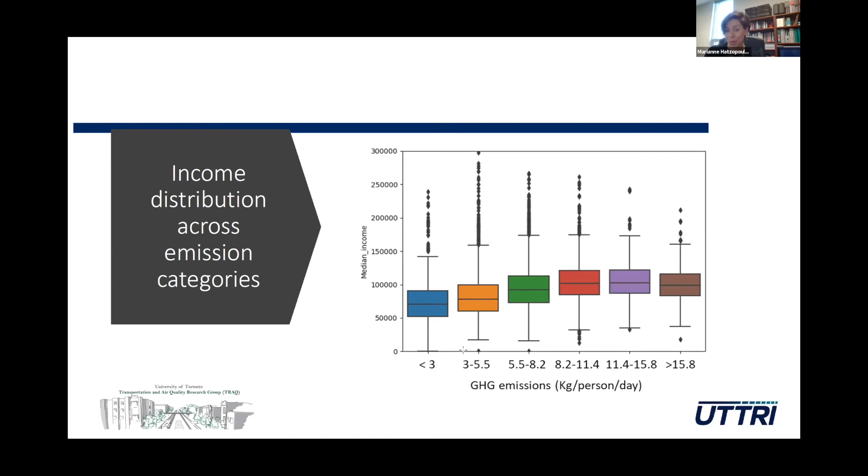To contextualize things for you, a typical car emits about 200 grams of CO2 per kilometer. So if you drive 10 kilometers one way, that's 2 kilograms, and another 10 kilometers the other way, that's 4 kilograms. So if you're emitting like 8 to 10 kilograms a day, you're driving a lot on a daily basis. But this includes everyone, including people who take transit. So if you take transit, the emission intensity for transit in the GTHA is about 18 grams per kilometer. So even if you travel a lot, your footprint is much lower.

We also looked at here, so this gives you another idea of this inequality. This is called the disparity ratio. It's very simple: what we're doing is looking at the emission intensity across different income groups, and dividing it by the emission intensity of the highest group, to give you an idea of what proportion of the emissions are borne by every group. This is not total emissions, this is greenhouse gas emitted per kilometer.

So this is sort of like your intensity. If you normalize for all the trips that you do, if you're a lower income individual, you have a lower emission intensity, which means more likely you are taking transit, you are taking the bus, you are not driving. And in the highest income category, you're going to see the highest emission intensities.

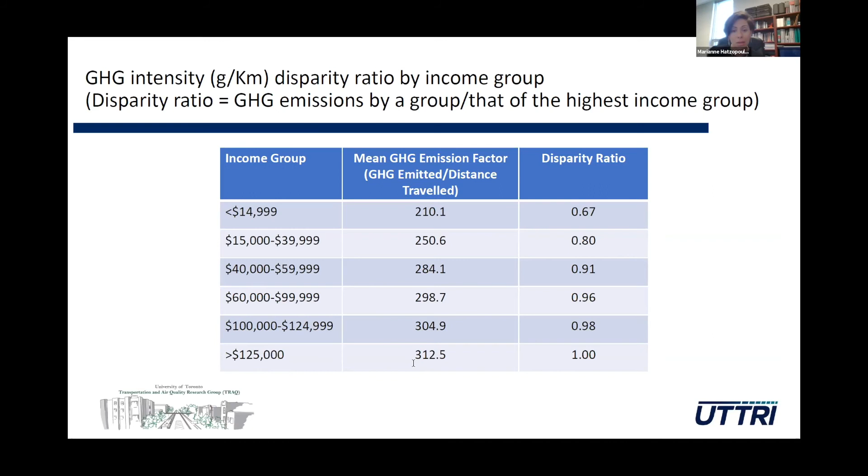Beyond income disparity, we thought, okay, income is personal. If you have a higher income, chances are you have more cars and you drive more. But let's also look at the land use, the built environment, and where you live and choose to live.

So we use a measure in transportation called accessibility, and specifically a very simple measure called the cumulative opportunities measure. What we do is, for every neighborhood, generate a buffer of 2, 3, or 10 kilometers, and count all the different opportunities—jobs, restaurants, commercial establishments, community centers, parks, whatever it is—that are accessible to you. You can generate these accessibility measures by mode of transportation for specific sectors and opportunities.

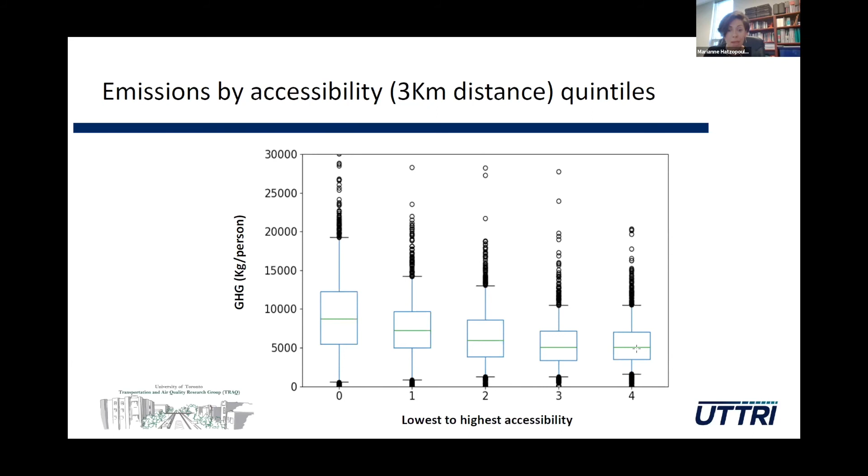What we wanted to do is look at how these measures of accessibility relate to greenhouse gas emissions. This is sorted in quintiles of accessibility, and what you're seeing is that neighborhoods with the highest levels of accessibility have the lowest greenhouse gas emissions per capita. So if you live in a neighborhood with higher population density and more commercial establishments, you're more likely to walk or bike, and your transportation carbon footprint is lower.

We looked at average number of vehicles, keeping everything else as it is. If you have more cars per person in your household, you are emitting more—that confirms our intuitive hypothesis.

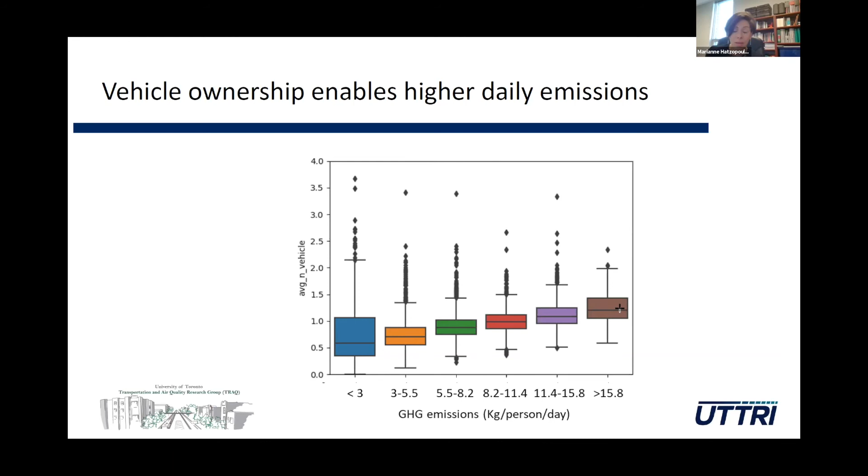We didn't see a very big effect in terms of total number of trips—only a mild effect, so people who do a lot of trips in a day aren't necessarily the ones emitting more. It's really how you're doing your trip. That's an interesting finding, because I'd always thought reducing transportation emissions meant making people travel less—just work from home and not go around doing a lot of things. But in fact, doing a lot of trips in a day and chaining them together because you're running errands isn't really a big predictor of your total carbon footprint. It's all the other things we're talking about—essentially how you're doing these trips and what modes of transportation you're using.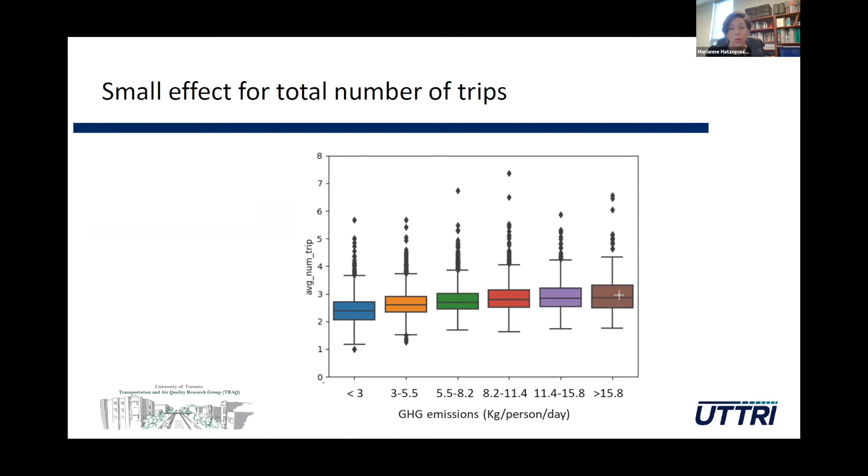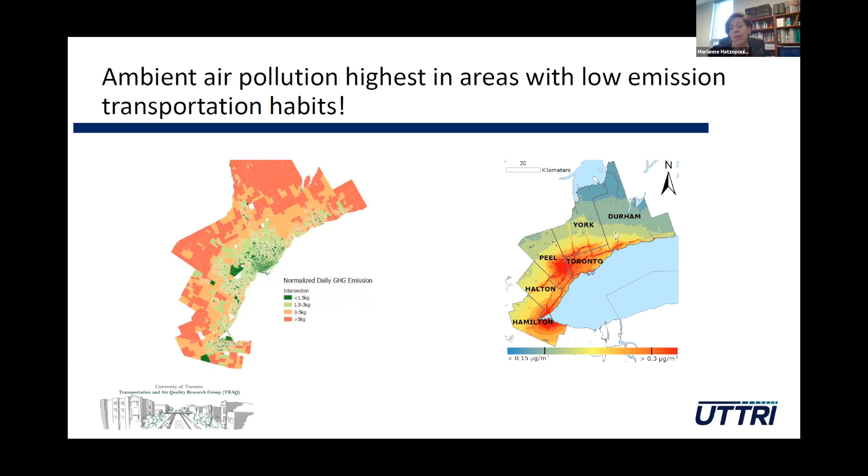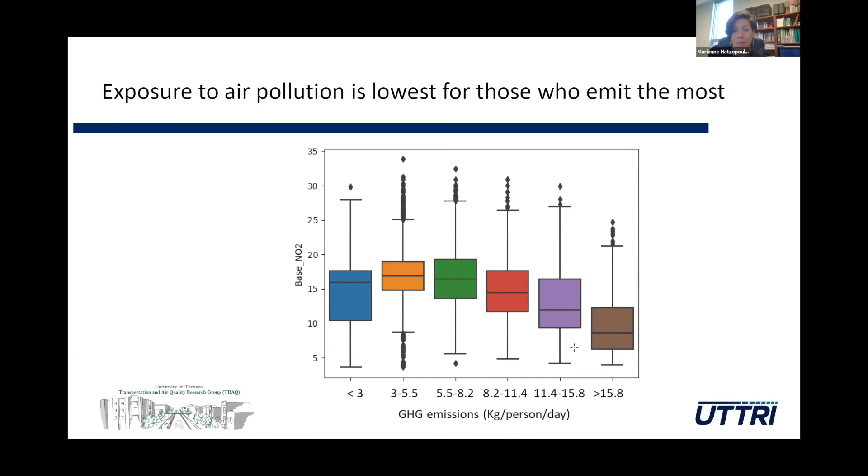So when we put all of this together, we basically looked at all of this information.

We said, let's train a machine learning model. This is a gradient boost model that would look at all of these characteristics for every individual and try to predict your carbon footprint from transportation using information that has nothing to do with what you are doing right now.

So what this plot shows you is that when a color is red, it means that feature is increasing. And on the x-axis, if the feature is red in the positive, it means it has a positive effect on the outcome.

So if you look at the average number of vehicles, you'll see that as the number of vehicles increases, so the feature becomes red, the model output, the total carbon footprint from that individual, is also increasing. That helps visualize whether relationships are monotonic, like very linear, or U-shaped, for example. It captures a little bit better the relationship between these.

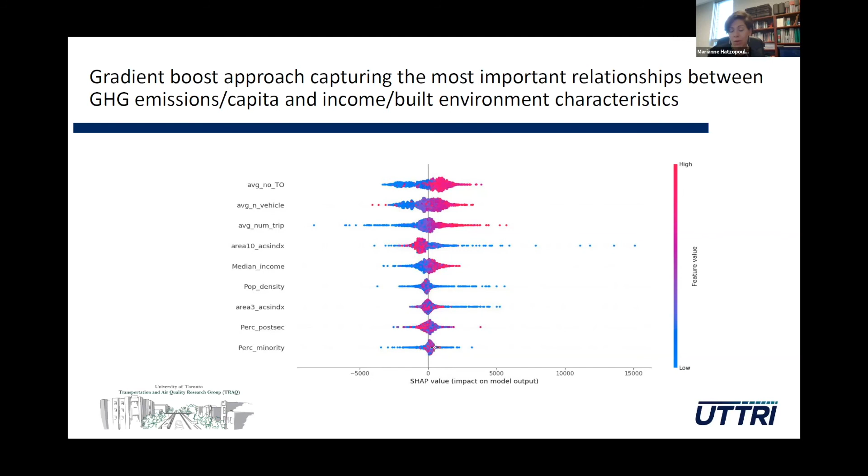Needless to say, all of these things I showed you are actually powerful predictors: the average number of vehicles, the total number of trips to a small extent, accessibility, income, population density. The percentage of visible minority is also there, but it's a very, very small effect, which is why it made it into the model. We found a much bigger effect just using income in its own right.

What we're branching into right now is this idea that, having quantified those personal greenhouse gas emissions and mapped them out for different parts of the entire city, using all these characteristics from the travel survey to predict greenhouse gas emissions, we thought: if I take an aerial view picture of the neighborhood where you live, it already embeds everything I need to know about that neighborhood — if you have curvilinear roads, if it's suburban or urban, probably how many cars are in it. So why don't we start training deep learning models that just use the image, take an image and predict your carbon footprint from transportation?

This is kind of the big thing we've embarked upon. We have 250,000 images for the GTHA that we're training using convolutional neural networks to see if we can predict GHG emissions from the images. This is just for transportation.

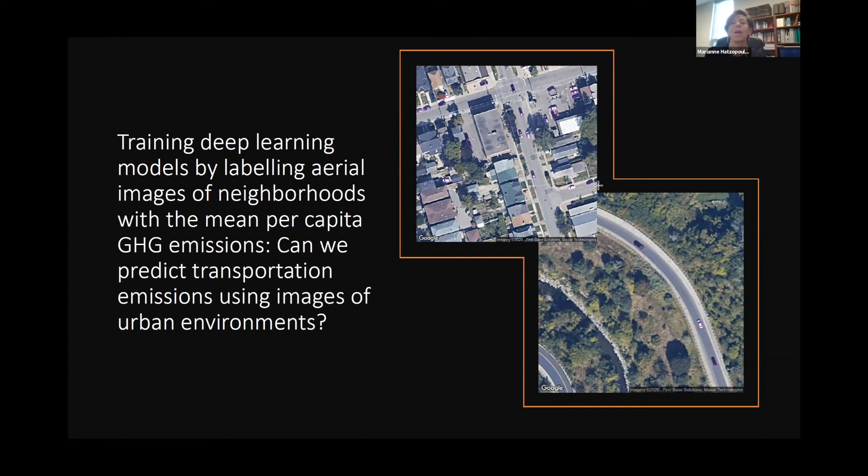With this, I think I'm going to try to close the gap, and I'm not going to go through the other studies I wanted to talk about, and stop here so we can move on. Is that fine, Jamie? Yes.